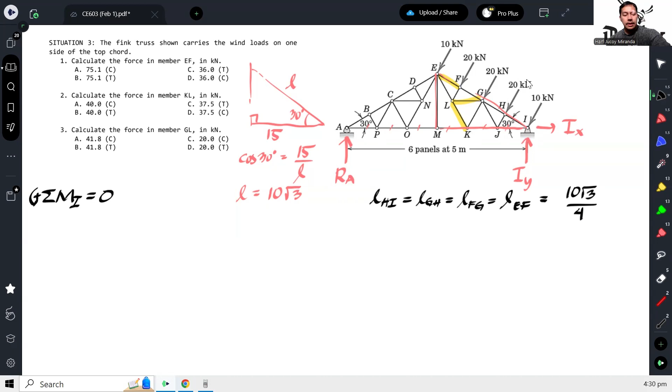So 20 times 10 square root of 3 over 4, that's its moment arm. Then another 20, this time it's 10 square root of 3 over 4 times 2, because there are two - this plus this.

Then the next 20 is 10 square root of 3 over 4 times 3. And lastly, this 10 is 10 times 10 square root of 3 over 4 times 4, or basically just 10 square root of 3 since it's the full length. Then the reaction at A - minus RA multiplied by this length.

And what's the total here? 6 times 5 equals 30. So 30 equals 0.

Another approach to make this easier, which others use, is this: since all the forces are symmetrical, you can get their resultant. The resultant is located at the center. So the resultant equals 10 plus 20 plus 20 plus 20 plus 10, which is 80. So you can summarize it as 80 times this distance, which is 10 square root of 3 over 4 times 2.

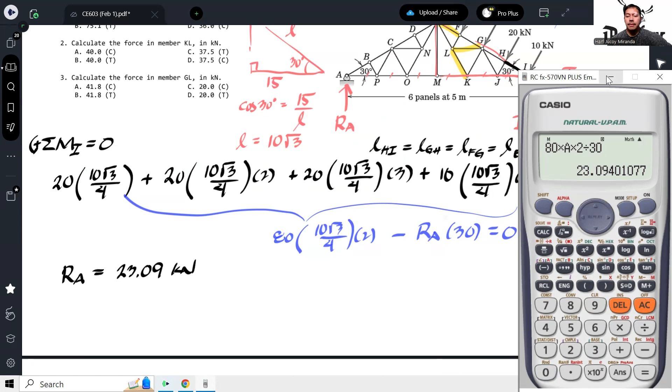Maganda lang dito kasi applicable to, kasi symmetrical yung loading. So wag niyo gagawin, syempre, kung hindi symmetrical yung loading. Kasi ang mangyayari doon, kailangan mo pang hanapin yung location ng resultant nila by Varignon's theorem. So ganun din, mag-moment ka rin. So might as well na mag-moment ka na kagad para sa lahat.

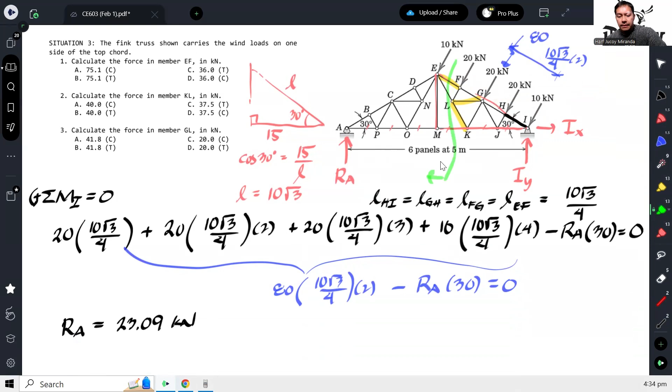Okay, so that will be the reaction at A. Tapos, ang gagawin ko na ngayon is I will cut here, and then isolate the left side. Okay, so drawing natin dito sa kabila. Actually, hindi ko na kailangan i-drawing ng detalyado itong mga nasa kaliwa na members.

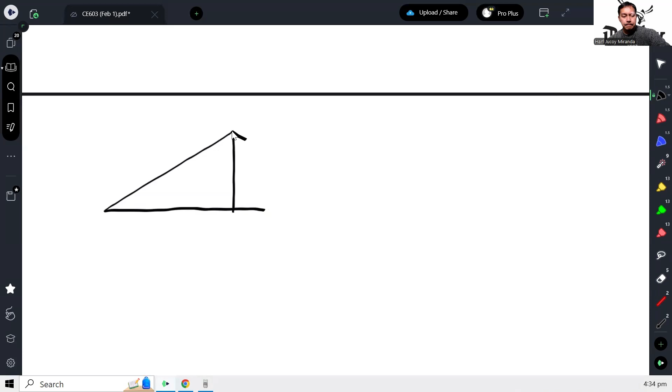Kung saan na lang ako nag-cut. So meron doon, meron dito. Meron dito, so meron ditong force. Gaya nating kulay ng mga force. Okay, so dito merong force. Meron ditong force, tapos meron din ditong force. Tapos meron ditong reaction, yung RA.

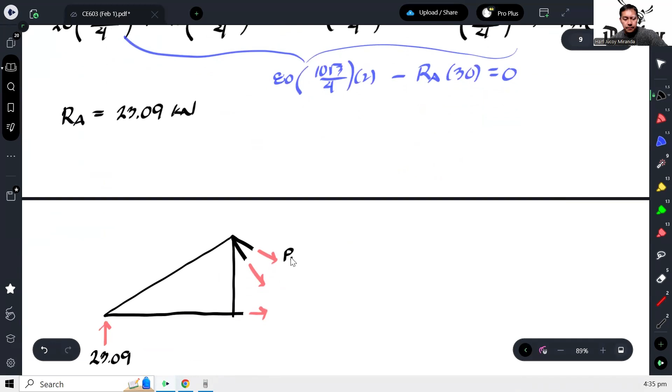23.09. Okay, tapos isa sa mga yan is yung EF. Ito yung EF. Okay, kung gusto niyo i-drawing lang dito, pwede naman, kaya lang walang silbi, no? Yan lang naman kasi yung kailangan natin.

So para ma-solve kagad natin yung EF, ang diskarte ay mag-moment ka kung saan magkoconnect itong dalawang missing na force. At saan ba yung magkoconnect? Hindi ba sa K? O, di sa K tayo mag-moment. Okay, don't forget pala, meron pa pala ditong force na 10 kilonewton, ayan, baka makalimutan.

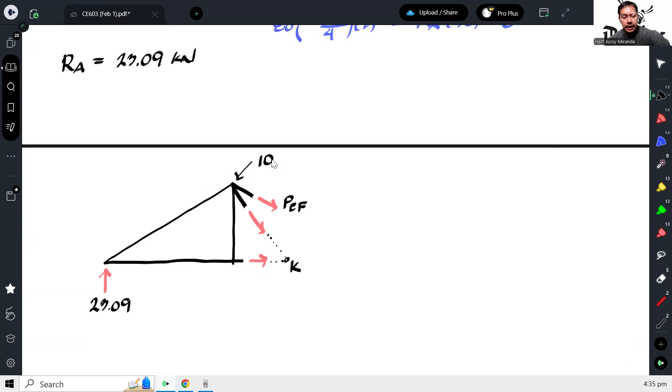Okay, so taking summation of moment at K is equal to 0, assuming counterclockwise positive. Okay, so meron tayong 23.09 na ang moment arm, yung sukat na to kasi 15 eh. Kasi ito 5, di ba? So, 20.

Okay, tapos ang rotation niya clockwise. Okay, tapos itong 10, medyo tricky ng kaunti kasi kailangan natin i-component yung 10. So meron itong horizontal tsaka vertical component. Okay, tapos kailangan ko lang ng angle niyan. So balik tayo doon sa figure. Okay, dito.

Ito na sa taas. So take note na kapag meron kang certain line na perpendicular doon sa another line, di ba may angle dito na 30 degrees? Okay, so kapag in-extend ko to hanggang dito, 90 pa rin to. So ibig sabihin 60 to.

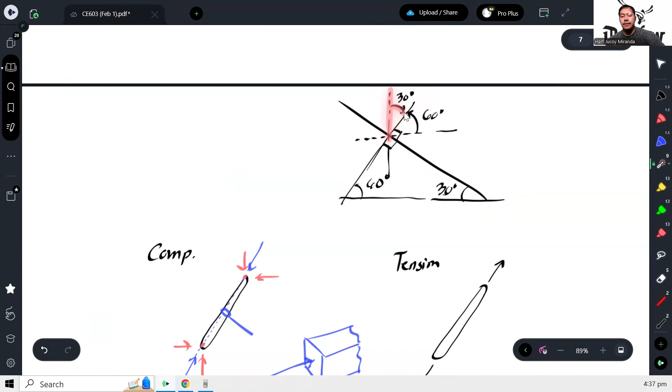Ngayon, kapag nag-drawing ako ng another line dito, etong 60 na to ay ito rin. So ibig sabihin, kapag nag-drawing ka ng vertical line, ito naman yung 30 degrees. Okay, so tandaan niyo na yan, basta perpendicular, yung horizontal angle or yung angle with respect sa horizontal, paglipat doon sa perpendicular line, magiging angle siya with respect to vertical. Magbabaliktad. Okay, di ba ito galing sa horizontal? So kapag nilipat mo yan doon sa perpendicular na line, lagi yung with respect naman sa vertical. Okay, so ibig sabihin, itong force natin na 10 kilonewton na perpendicular doon sa roof, yung angle dito ay 30 degrees.

Ayan, so yung component niya madali natin makompute. Okay, so ito muna ang horizontal component. So, 10 sine of 30. Tama ba? Ito kasi yung 10, ito yung 30 degrees. So yung horizontal component natin ay opposite, tapos yung vertical component natin ay adjacent.

Okay, and then what is the moment arm? So ang moment arm natin dito ay ito, which is ito rin yun, yung triangle kanina. So I think masasolve naman natin yan. Tawagin natin na y. So gamit ang tangent function, tangent of 30 degrees ay equal sa y over 15. So therefore, y is 15 tangent 30.

So, 15 tangent 30, Ayan. Oh, yung kanina, store natin. Ito, store natin sa B. Nilagay ko to sa B. Okay, so we have, ano yan?

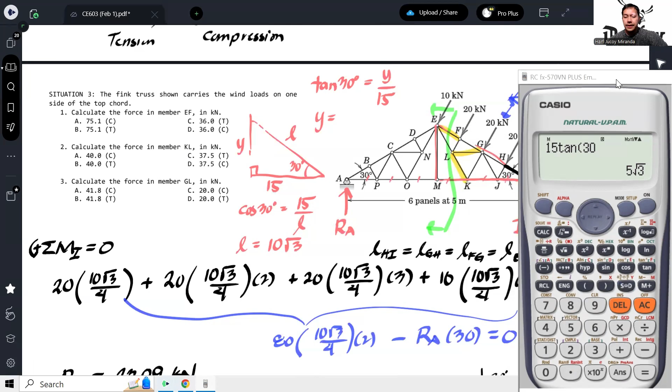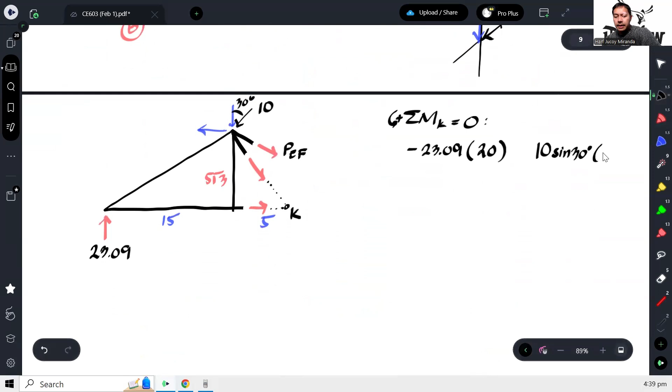15 tangent 30, so yan, 5 square root of 3. So this is 5 square root of 3. So ang moment arm natin dito, which is, ito ay 5 square root of 3. So that would be 5 square root of 3. So the rotation of its x component about k ay counterclockwise.

So plus, doon naman tayo sa vertical component. So that's gonna give us 10 cosine 30. Ang moment arm naman nun from k ay 5. Ang rotation niya is again counterclockwise.

And then lastly, itong EF, di ba? So yung EF, iko-component din natin. So pwede naman na dito lang tayo mag-component. So di ba, itong EF na to, magkakaroon ng horizontal component tsaka vertical component. So pwede naman yun. So bali, yung vertical component niya, ang moment arm is 5. Yung horizontal component niya, ang moment arm niya ay itong 5 square root of 3.

So walang problema doon. Kaya lang, meron kasing technique na principle of transmissibility, na kung saan pwede mong ilipat yung force na yan along its line of action. And di ba ito, I ito, ito yung I.

Bali yung force dito, lilipat ko dito. And you might ask, bakit kaya ililipat? So tingnan natin kung bakit ko gustong ilipat. Okay, so lipat natin dito.

Ayan. So kaya gusto ko ilipat dyan si PEF, ay para yung component niya na vertical, iikot sa K. Pero yung component niya na horizontal, hindi na iikot kasi dadaan mismo dun sa K. And ang mangyayari lang, iikli yung equation natin. Yun yung maganda. Okay, so also take note that this angle is 30 degrees.

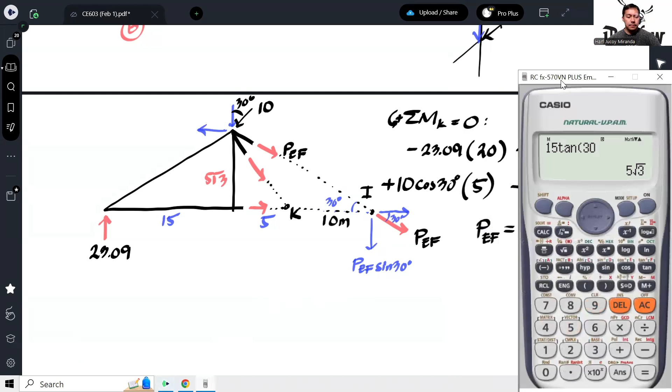Okay, ito ay nasa B times 20. Negative nga pala, negative. Tapos plus 10 sine 30 times 5 square root of 3, plus 10 cosine 30 times 5 over 10 times sine 30.

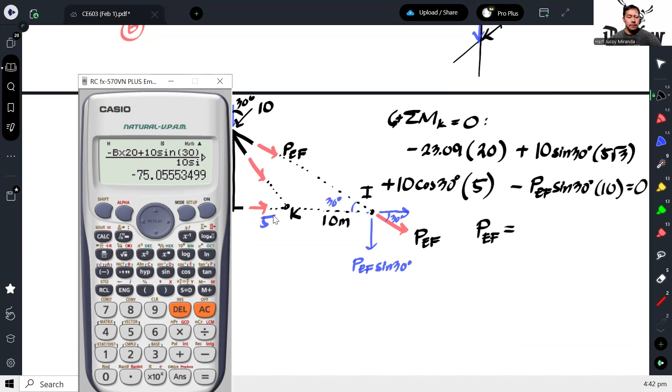Okay, so lumabas dito ay 75.06, or 75.1 approximately. O, lagay na lang natin 75.06. Pero negative, ano, negative.

So the negative sign indicates that our force, no? Kasi ang inassume ko sa force, ano eh, inassume ko kasi na tension siya, away from the body. So ngayon, inassume ko siya na tension, so ibig sabihin, ang tama pala dapat ay compression. So ibig sabihin, our answer would be in compression. So answer is letter A.

Okay, next, calculate the force in member KL. Dito naman, force dito, no? So ito medyo tricky ng kaunti. Kapag mag-method of section tayo ulit, pwede siguro dito tayo magka-cut.

Ang problema lang, apat yung dadaanan natin na member. At kapag apat kasi, kulang yung equilibrium equation mo. No? So hanggang tatlo lang kasi, summation of forces x, y, tsaka moment. So nahirapan tayo. So ang naiisip ko dito na pwede pa natin gawin is mag-method of joint sa L.

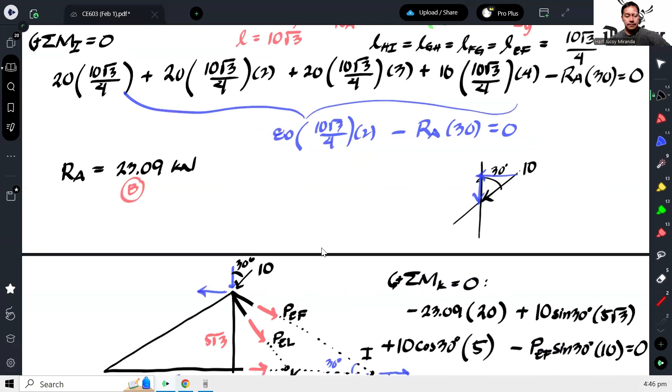Assuming counterclockwise positive, unahin na natin ito, 23.09, that is a distance of 30. Tapos, that's negative kasi ganito siya, clockwise. Tapos itong 10, wag na natin i-component kasi alam naman natin yung perpendicular distance niya dun sa point of rotation natin, which is yung length kanina dito. So 10 times yung length kanina dyan, ito yun, 10 square root of 3, di ba? And then our rotation yan is counterclockwise, or plus.

Ang natitira na lang na force, itong EL. Once again, yung EL na yan, kung i-retain mo sa point na to, meron siyang vertical component na iikot sa I, tapos meron din siyang horizontal component na iikot sa I. Pero may option ulit tayo, according to principle of transmissibility, pwede mo siyang ilipat dito. Para yung vertical component niya iikot sa I, pero yung horizontal component niya hindi na iikot. Ganun na lang, lipat natin.

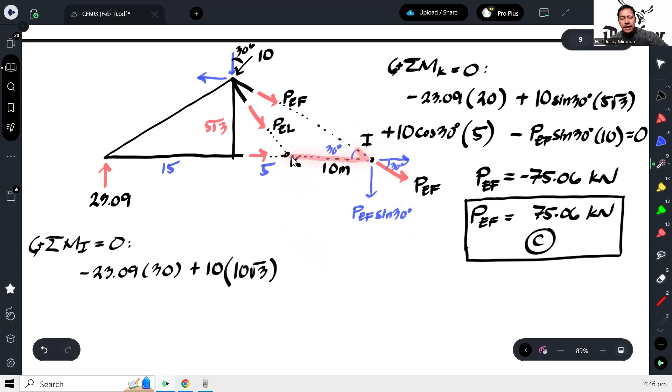Ayan, para ito ngayon yung vertical component niya, ito yung horizontal component niya. So this is PEL. Isang problema pa pala, ano yung angle na yun? Balik tayo dito.

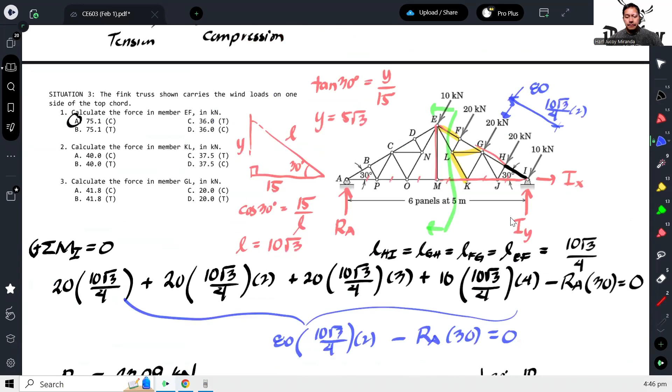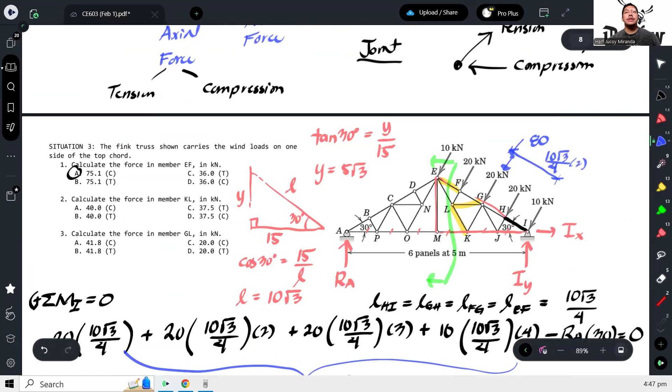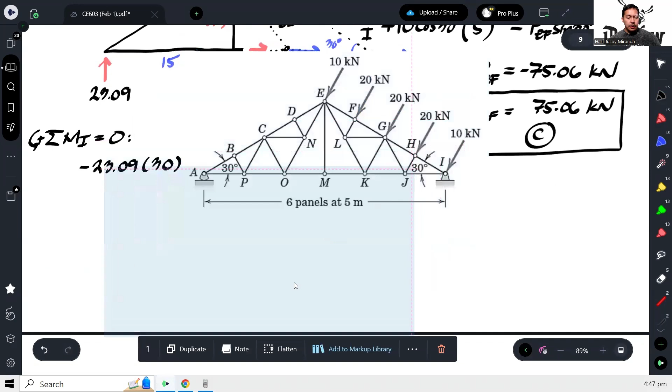If we would take, para malinis tignan, I'll just take another figure na lang sa baba. So if you would look at the figure, bali 30 degrees to, may 30 degrees yan. Tapos ito ay right triangle, kasi 90 degrees to. So lalabas 60 to, 60 to. So dahil 60 to, sa kabila, right triangle din yan.

Makapansin nyo nga na ito, symmetrical, so ibig sabihin 30 rin ito. Tapos ito, 60 din. So lumalabas ngayon na kung 60 tong dalawa, ano to? Di ba this is supplement, or ano ang tawag dito? Straight line, so dapat ito ay has a total of 180 degrees. So that's 180 minus 60 minus 60, so ibig sabihin 60 rin to.

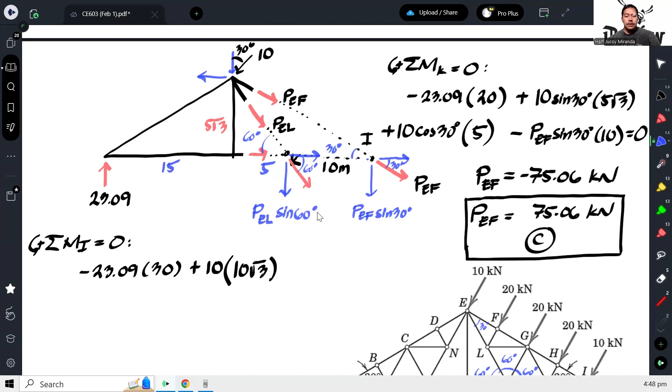So therefore, we can now define yung slope nito ay 60 pala. So 60 to, ibig sabihin yung PEL na vertical component ay PEL sine of 60. Therefore, that particular component, PEL sine of 60, iikot sa I na merong moment arm na 10, at ang rotation niya ay clockwise. Therefore, that is all equal to 0.

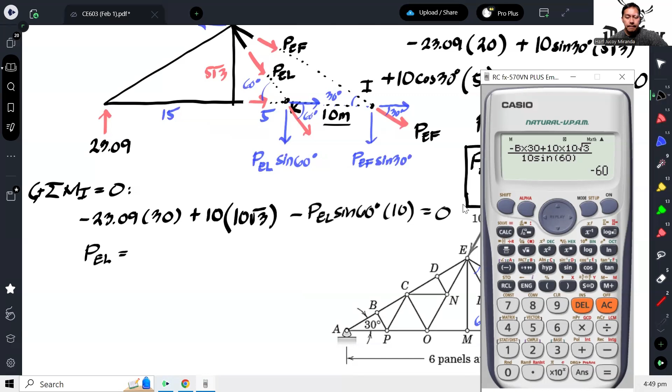And from here, we can solve for PEL. So that is negative B times 30 plus 10 times 10 square root of 3, over 10 sine 60. Okay, so PEL gives us 60. Wait lang, may kulang pa.

Meron ba tayo na miss out? Nandito yung reaction, so yun, iikot, moment arm is 30. Tapos you have etong 10 na to, moment arm is this distance, 10 square root of 3. Ang rotation ay counterclockwise, that's why this is positive. And then we have PEL sine 60. Mukhang tama naman, so 60 nga, negative kilonewtons.

Okay, so after we calculate EL na 60 kilonewtons, we can now define, meron na tayo nito, meron na tayo niyan. Ang goal kasi natin, di ba, mag-join tayo dito. So meron na tayo nito, check na to, okay na to. Ito naman, problemahin natin.

Punta tayo sa joint F. Okay, at joint F, ito siya. Meron ditong 20, so malamang meron ditong force na EF at saka FG. Tapos dito rin merong force na FL. So dito halatang-halata naman na kahit na wag na tayo summation of forces, wag na tayo mag X and Y. Halata naman na kapag tinignan mo tong axis na to, equal to.

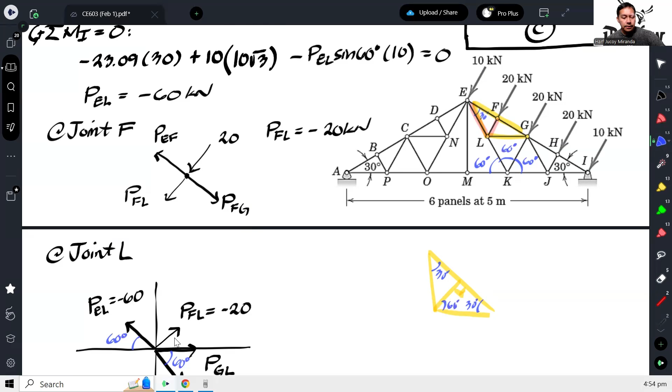To solve for the two remaining unknowns, we'll take summation of forces. I think it's best to start with summation of forces in y, since this is the only unknown with a y-component, so we can solve it right away. So taking summation of forces y equals 0, assuming upward as positive, let's not plug in the values yet.

So PEL is upward, sin 60, positive. PFL is also upward, so positive, sin 60. And PKL is downward, so minus PKL sin 60. All equal to zero.

The sin 60 terms just cancel out when divided. Then we substitute the values: EL is positive 60, FL is negative 20, minus PKL equals 0.

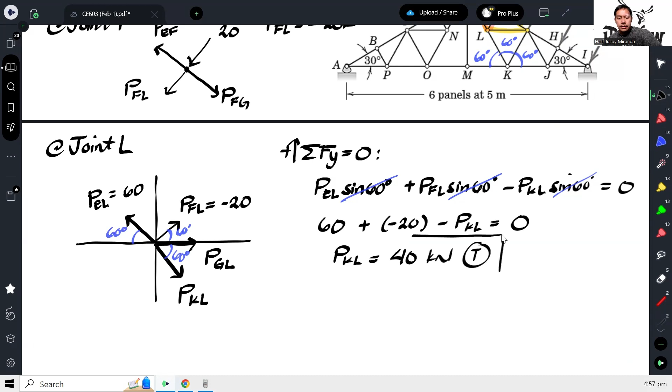Therefore, this comes out to 40 kilonewtons. Since the resulting value is positive, this member is under tension. So our answer is 40 — PKL is 40, tension.

Okay, last one: calculate the force in member GL. Here we are now, so just GL left. We'll take summation of forces, with to the right as positive. So we have PEL to the left, negative.

Cosine 60. Then PFL to the right, positive, PFL cosine 60. Then PGL to the right, and PKL to the right also, cosine 60.

Now let's substitute the values. PEL is positive 60, so positive 60. PFL is negative 20. GL is unknown. And PKL as calculated is positive 40.

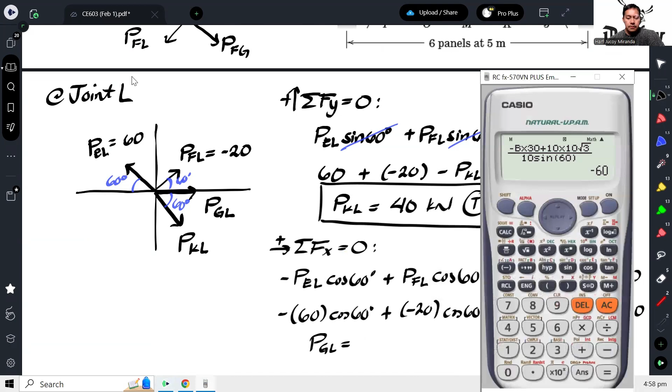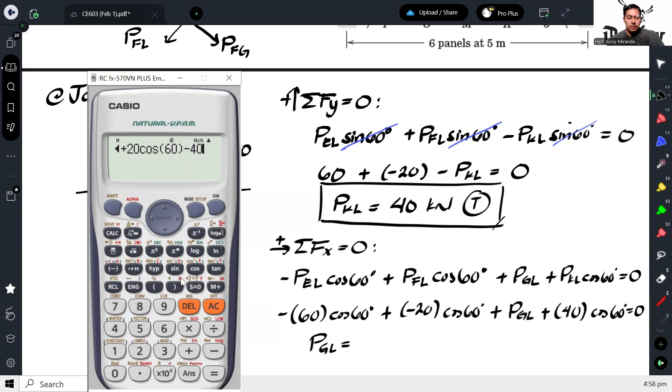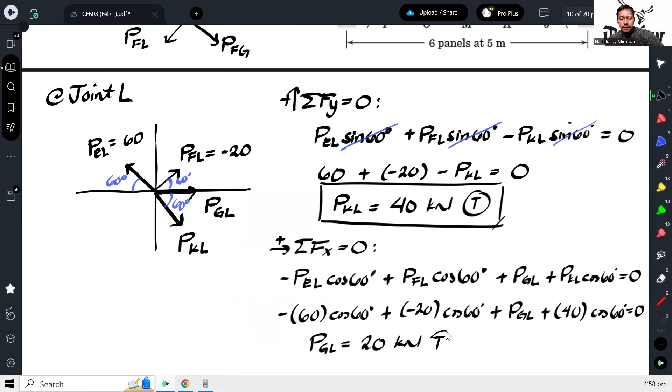From here, we should be able to calculate the force at GL. And that gives us 20, positive again, so it's tension. So the answer is letter D.

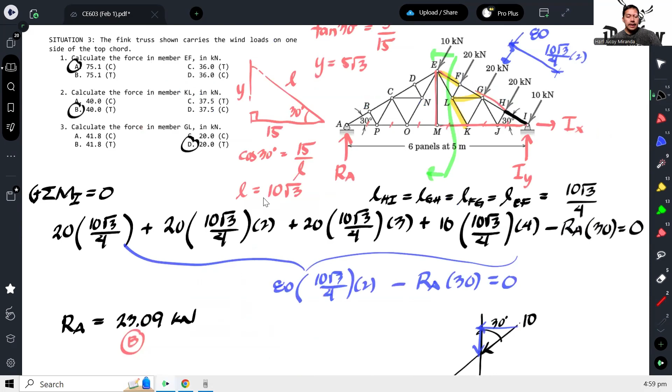All right, and that's how we solve this particular truss.